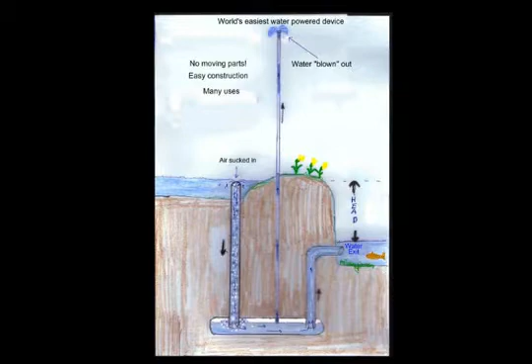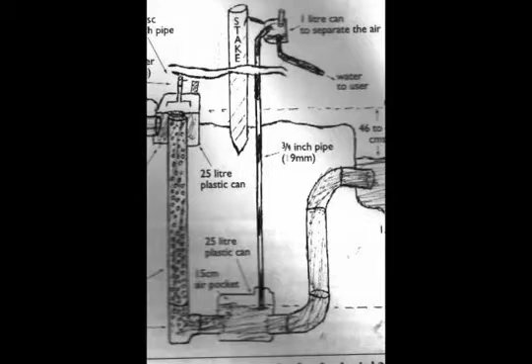A pulser pump is a combined trompe, which is where the water is being carried down in the diagram, and an airlift pump, which is the small pipe which blows the water up in the air in the diagram. Water simply goes down through a pipe and into a chamber and carries air with it, and the air pushes water up through the chamber.

Airlift of water doesn't need to be straight up. It can be on an incline too, and that's useful if the pump is used in an area where you don't have the height, or you could have a long incline to where you're going to use the water. It's just useful in certain situations.

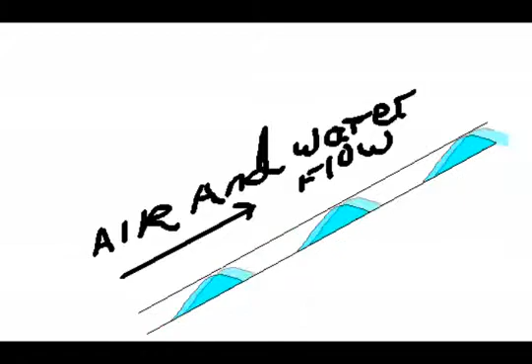Next we have a pulser pump beside the river, and it's pumping much higher. You can just see it in this old video I have, and we'll play the sound of the pump as well, just to give you an idea what it sounds like.

Next up, we're going to show you a little model of the airlift process, and that's the small pipe in the middle of this little diagram where the air and water mixture is being blown up in the air through the little small pipe, and it comes to you now.

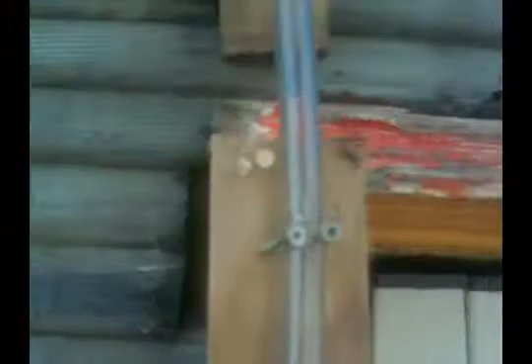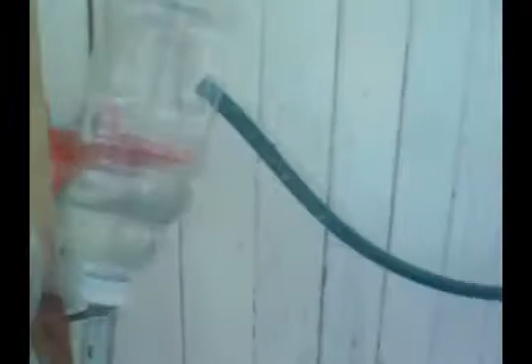Airlift pump model, pumping water up to 6 feet high, and it splashes down nicely on my lovely assistant, who is maintaining the pump. You can see the water just hold up as the water goes up. It doesn't, when pressure is off, instantly go back down. It stays held up very well in the pipe. And there's the pump working away.

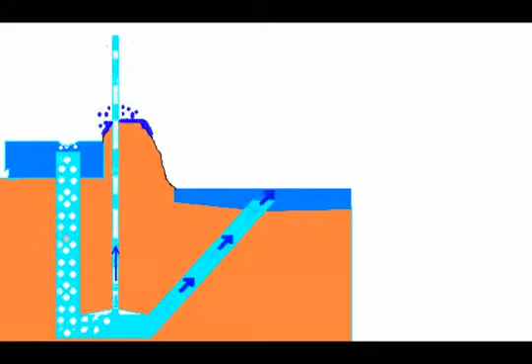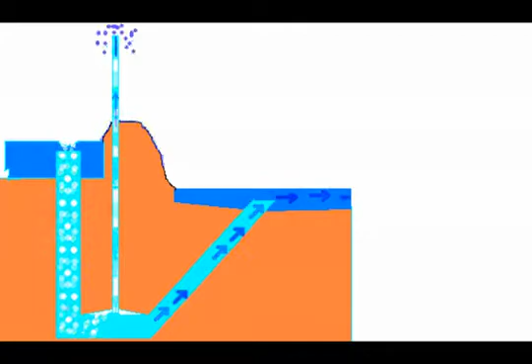Next up, we have the water carrying air down in a model, and it's the same as what is happening in the large pipe on the left of your screen now, and this is what takes place in the model that's coming up in the next little piece of video.

This would be the way the air bubbles go down in a normal pulser pump. The model is only 3/4 of an inch wide in the downpipe, so sometimes big bubbles which cover the entire downpipe happen. This doesn't occur in a normal full size, say 3, 4, 5, 6 or wider inch diameter downpipe.

Here we have a model of the entire pump. Here you can see the bubbles going down into the bottom chamber, right down here, quite a lot of bubbles, and it's going pretty fast, and then it's going to come up through the little small pipe, and the air bubbles come up through it and blow out some water.

The future of the pulser pump depends on you, because big science has no interest in it. Here's a pump that has worked for 18 years, has no moving parts, and it's just made of wastewater pipes, so anyone can make one.

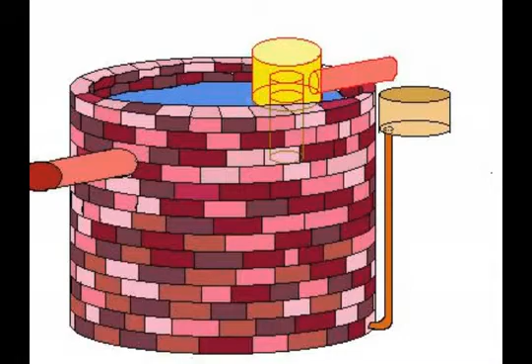There's no patents or anything like that, and it just needs to be verified by other people that it actually works. And so that just means making a model, making a pump, and there are lots and lots of uses for this type of pump.

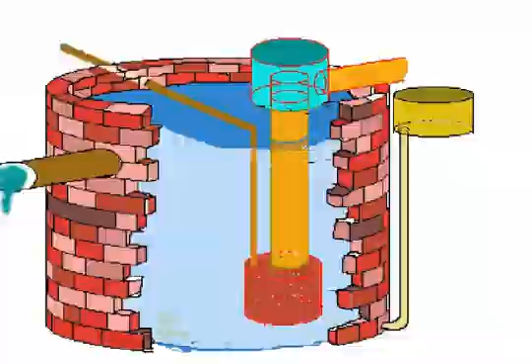The pulsar pump can be used for pumping water, for giving cattle drink, different animals drink. It can be used for washing sand. A pulsar pump could be used for washing clothes.

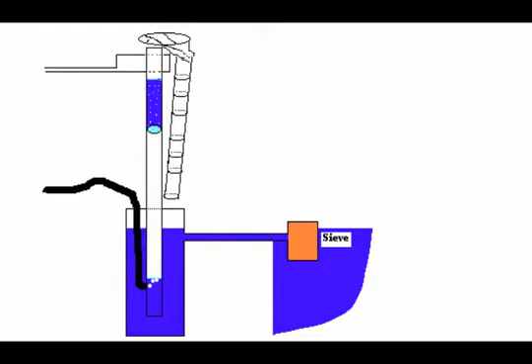If you're interested in doing experiments, you could improve the airlift part, possibly with lightweight pistons. I only show one, but I think it's a possibility to greatly improve it by experimental means, with small experiments. You don't need to do any fancy stuff because big science is just not interested.

So check it out, look in more detail at it, tell your friends and anyone who is into experimental science, and I believe we can move this device forwards and get it into use by perhaps millions of people across the world who have low head hydro but don't have the means to develop it with anything other than the simplest device. The pulsar pump is, I guess, the simplest hydropower device in the world.